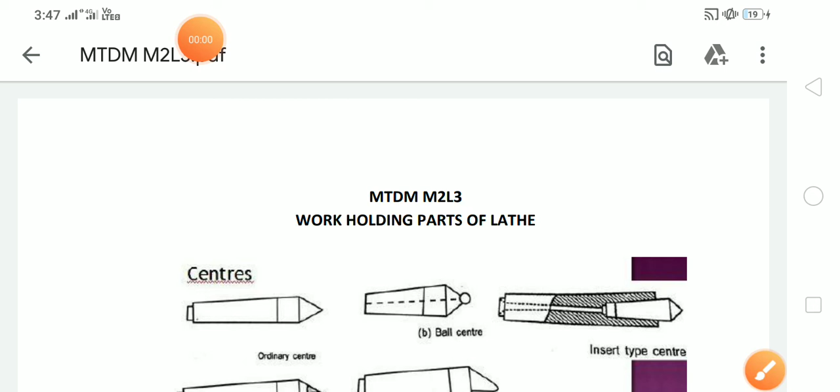Hi guys, today we will discuss the different work holding parts of a lathe, and also the accessories and attachments of a lathe. First of all, we'll discuss centers.

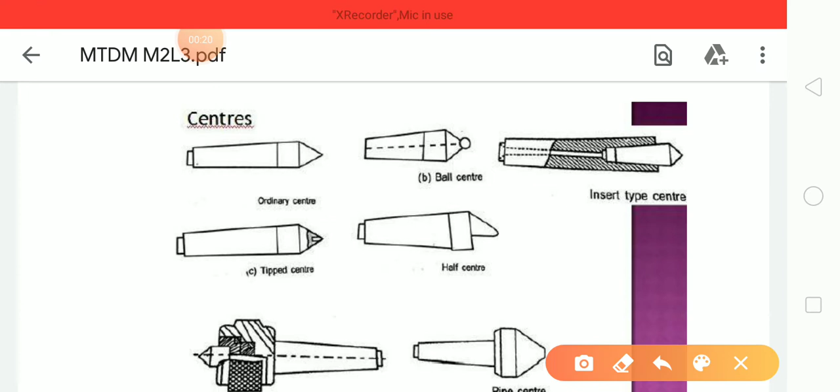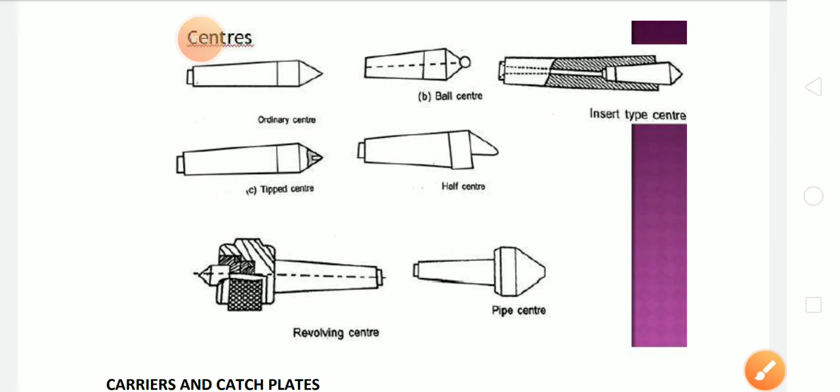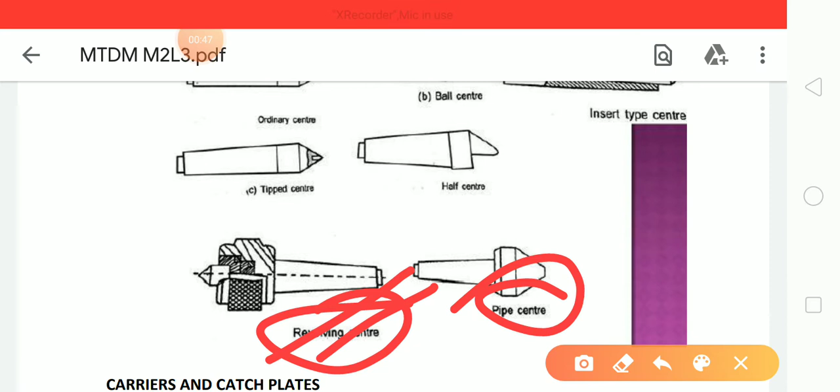Centers are those parts which can accurately locate the center point of a lathe, which is either rotating or not rotating. The rotating part is called the live center, and the part which is not rotating is called the dead center. There are also some more attachments for placing the center, that is the revolving center and the pipe center. The revolving center can be used to attach the workpiece firmly, and it will prevent slipping of the work, because the center is also rotating, so that force will be counterbalanced.

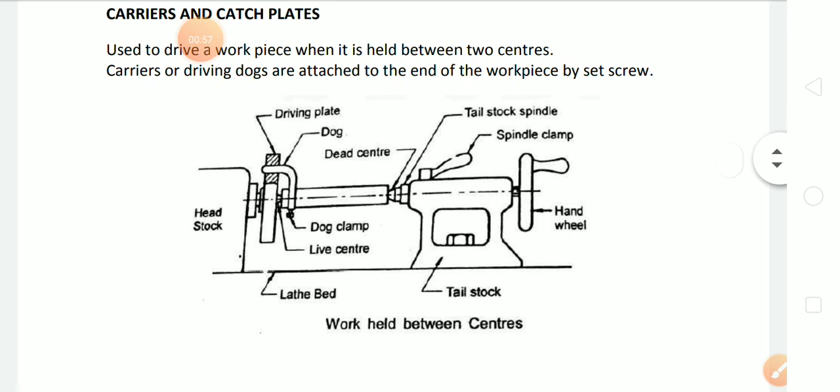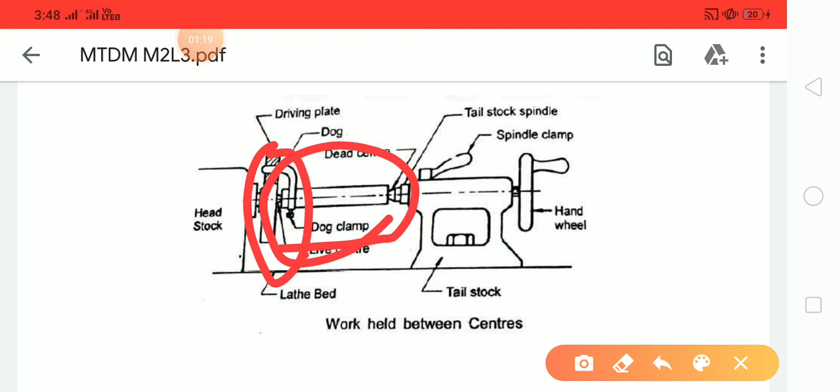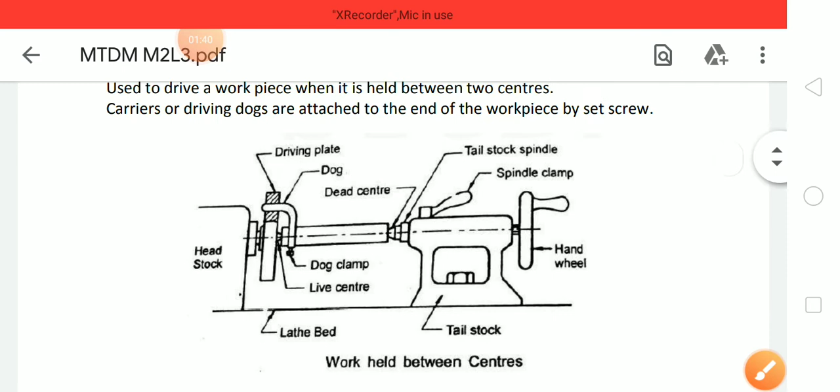The next one is chucks. A chuck is the device which is used for holding the rotating work and rotating the work. There are five important types of chucks that you have to study: 4-jaw chuck, 3-jaw chuck, combination chuck, collet chuck, and magnetic chuck.

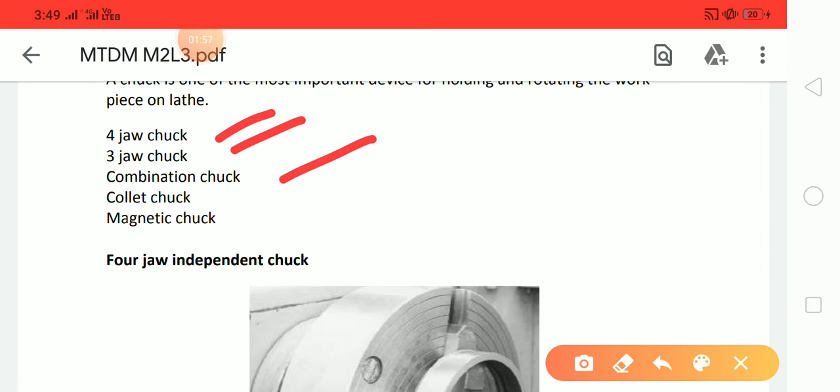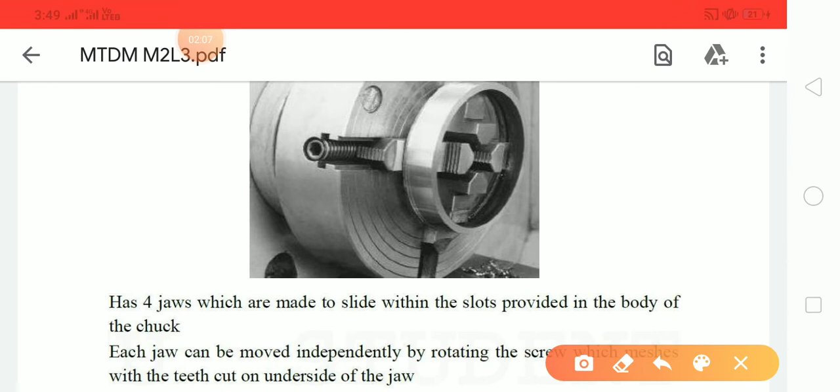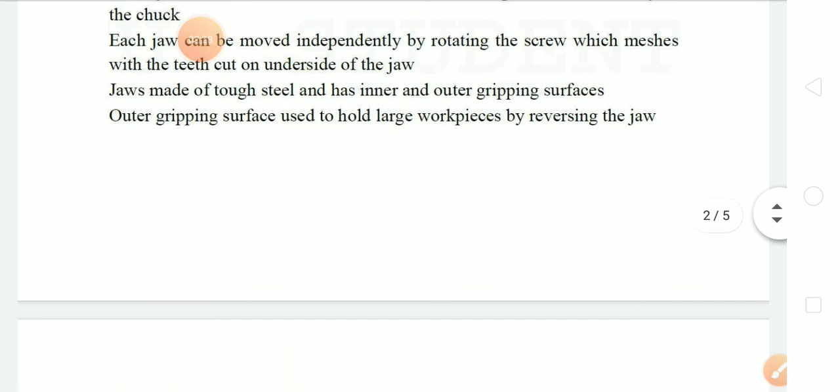The 4-jaw chuck is also called an independent chuck. You can see the independent chuck here. This chuck has to be centered, meaning the work has to be centered to remove any eccentricity. This workpiece has four individual separate pinions, so that each has to be tightened so that it will not rotate with any eccentricity. So that is called the 4-jaw independent chuck, and it is used for holding larger pieces without any slip, holding the workpiece very firmly.

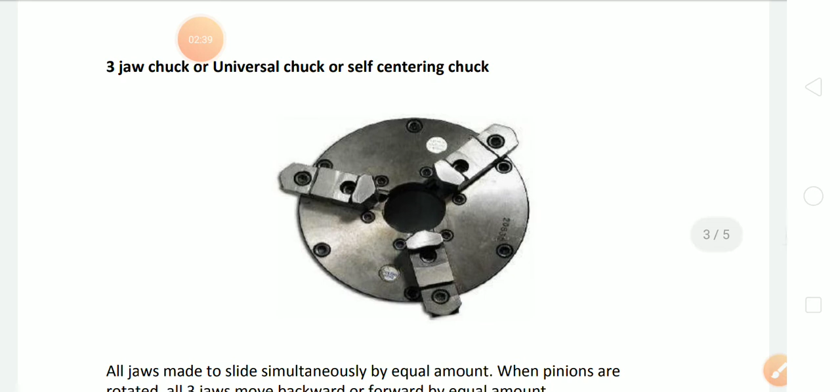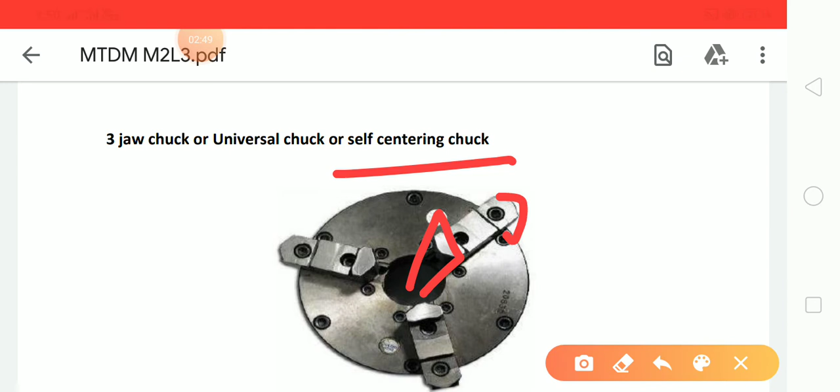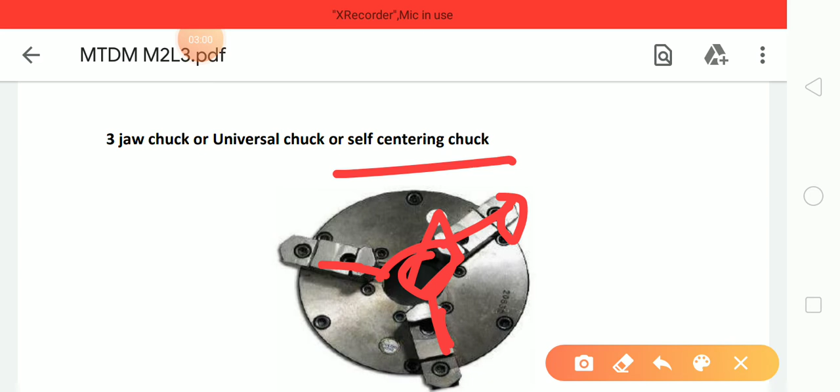The next one is the 3-jaw chuck, or universal chuck, also called a self-centering chuck. You can see why it's called self-centering, because you can just place the work here and simply rotate one of the jaws, so that the other two jaws will also come to the same amount for firm holding of the workpiece. So that is a self-centering chuck, and it does not require the process of centering.

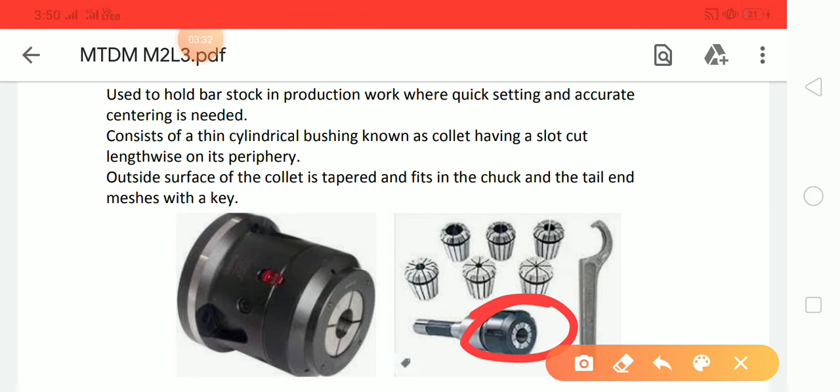The next one is the collet chuck. The collet chuck is used for precise and accurate centering, and also to reduce time consumption by simply keeping a workpiece here. This is the collet attachment, and these are the collet chucks - these are different for different diameters. Here you can see the collet holder, and you can simply press the collet chuck into it, and press a key there. This is the key where you can press, so that you can simply attach the workpiece and leave it, and it will automatically be held firmly in the chuck.

Now the next one is the combination chuck. These chucks can be used for self-centering, or either self-centering and independent chuck. It can also be used for separate screw operation, meaning you can tighten each screw separately, or it can also be used as an independent chuck.

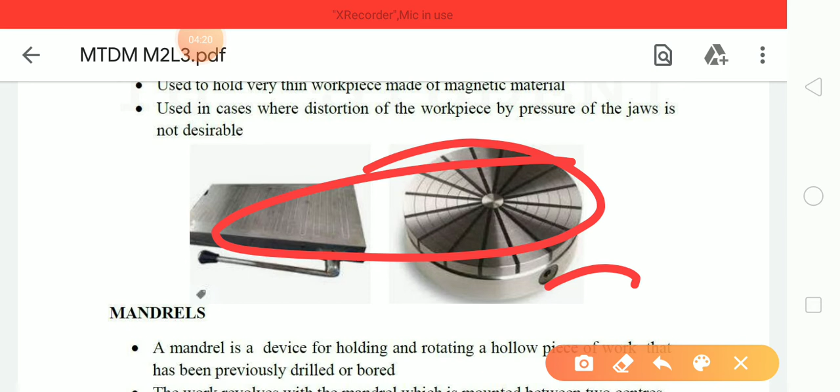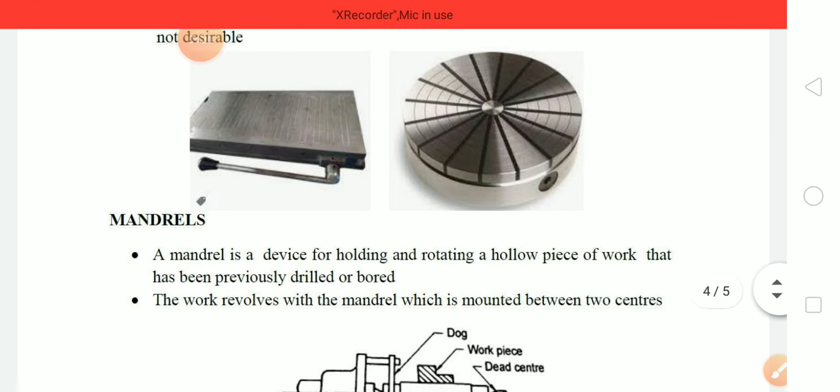The next one is the magnetic chuck. As the name indicates, it uses a magnet to place the object on the surface. We just put on the key to make the surface magnetized, so that we can place the workpiece over the surface and just put the key - the workpiece will be held firmly by the magnet.

The next one is mandrels. Mandrels are used for holding hollow workpieces. Here you can see the workpiece, and it is a long rod where the rod is held firmly between the centers, and this rod has the workpiece on it. When the rod rotates, the workpiece also rotates, and we can do the machining process.

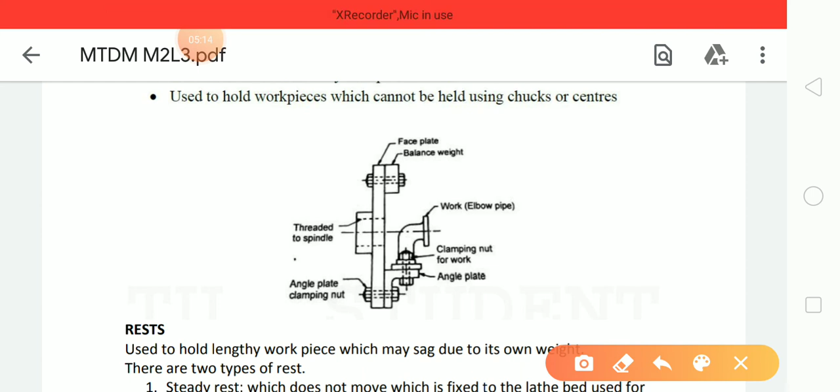The next one is the faceplate. A faceplate can be used to machine any intricate shaped object, such as the bent elbows of a pipe. It can be held - you can just look at the figure and easily see how it is held. Here, it is firmly tightened on the spindle, and the workpiece is held like this, and the edges of this workpiece can be machined using a lathe tool.

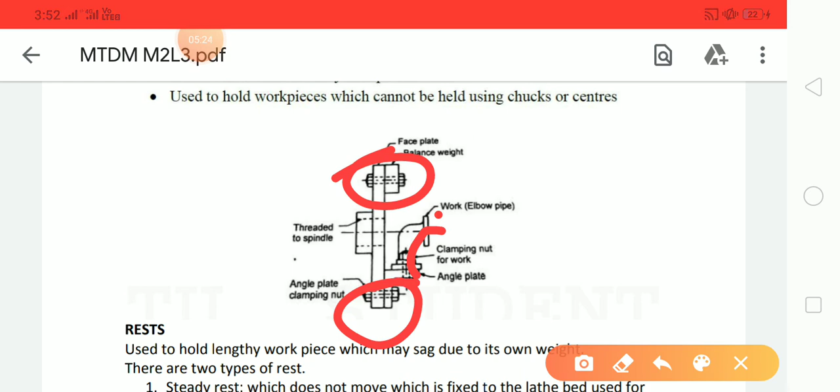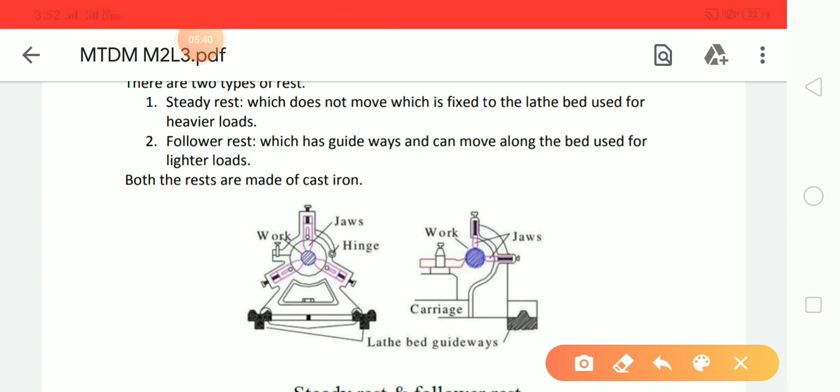The next one is the rest. The rest is used for heavier long workpieces. There are two types of rests: one is the steady rest, and the next one is the follower rest. The steady rest is fixed in the bed - it cannot be moved from one place to another, but the follower rest can be moved through the carriage. Like the carriage, it has some inverted V-shaped guideways through which it can move in a separate axis, but the steady rest cannot be moved.

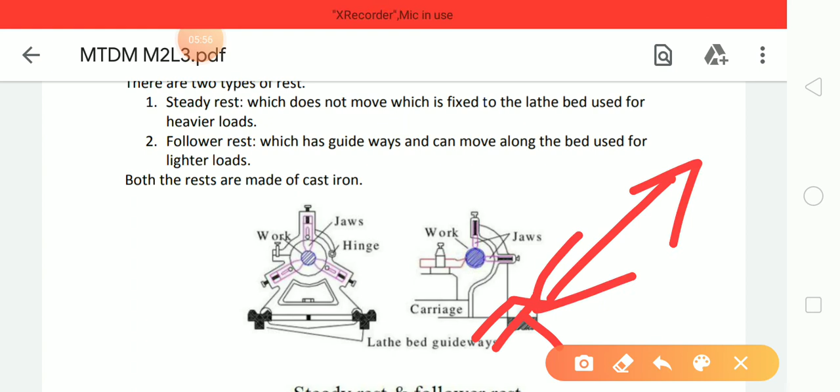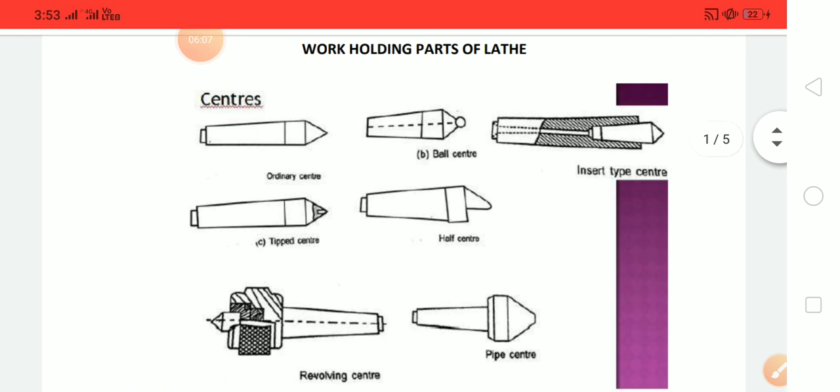So these are the important attachments and lathe accessories. You have to study all the figures and the functions of it. Thank you.